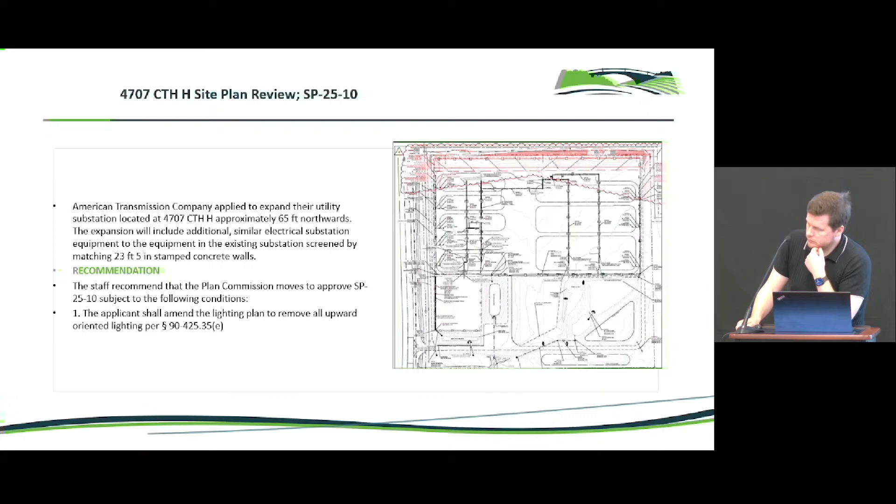Number 2, ordinance 02-2026, 3649 Lathrop Avenue zoning map amendment, ZMA 26-01. And it looks like that's gonna be Robin.

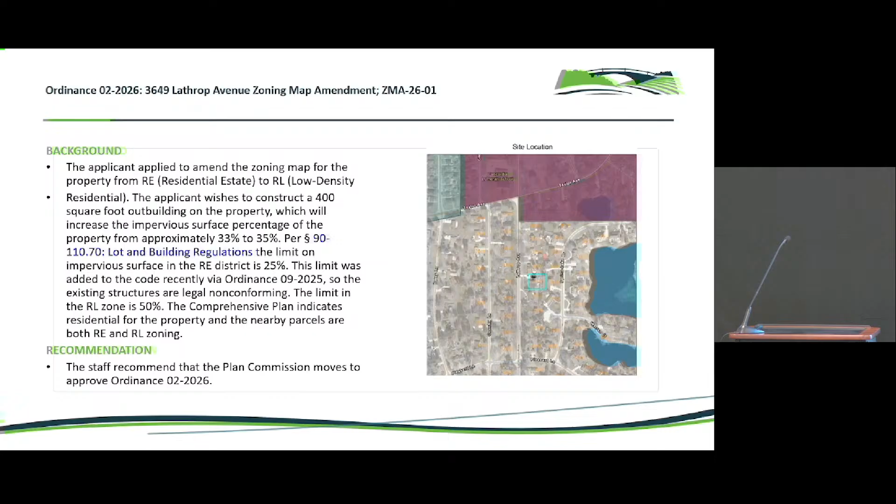Just a small aside on that last one. Some cell phone towers are disguised as trees, especially in California. They make them up to look like trees, probably because cell phone towers could be subject to the ordinance, but the utility companies are just like, shrug. The effectiveness of such disguises is left to the eye of the beholder, but it's something that I thought was neat.

Anyway, okay, so we're going on to ordinance 02-2026, 3649 Lathrop Avenue zoning map amendment. The applicant applied to amend the zoning map for the property from RE, residential estate lot, to RL, low density residential. The applicant wishes to construct a 400 square foot outbuilding on the property, which will increase the impervious surface percentage of the property from approximately 33% to 35%. Per the lot and building regulations, the limit on impervious surface in the RE district is 25%.

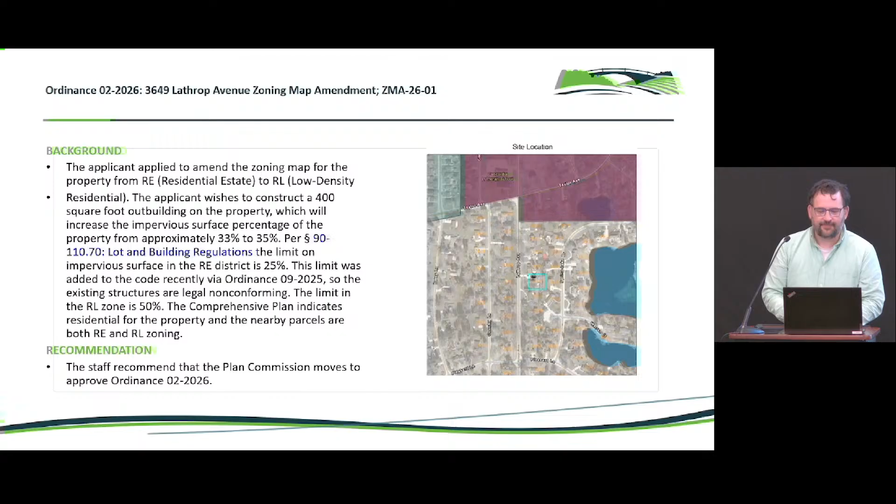However, this limit was added to the code recently via Ordinance 09-2025, so the existing structures and their impervious surface coverage are legal nonconforming. The limit in the RL zone is 50%. The comprehensive plan indicates the residential designation for the property and nearby parcels are both RE and RL interchangeably.

This is one of those parcels that is in an in-between area where it could conceivably be either of the zoning designations. In the 2020 zoning code, we usually picked one based on some factors. If it was a little bit larger, it got RE. If it was a little bit narrower, it got RL. All of the lots in the Spring Lake subdivision are RE, so sometimes adjacent lots also got that designation.

When the impervious surface change was implemented in summer 2025, staff felt the village would need to draft alternative compliance and flexibility components to prevent the need for variances or rezones over relatively minor code compliance circumstances. This application would be an example of where that would be needed. We didn't want to go out and do all of that until it was shown it would probably be needed.

Staff plans on bringing some suggested provisions to Plan Commission in the near future, with the goal of encouraging stormwater management best practices throughout the village. We're looking at different models, whether it goes under the stormwater fee umbrella, or uses some kind of bonus or credits for best practices. Other localities have that for rain barrels, rain gardens, and similar measures, as a thank you to people that lighten the load on our stormwater management system. So we want to build in flexibility, and reward folks who want a more pervious or stormwater friendly area.

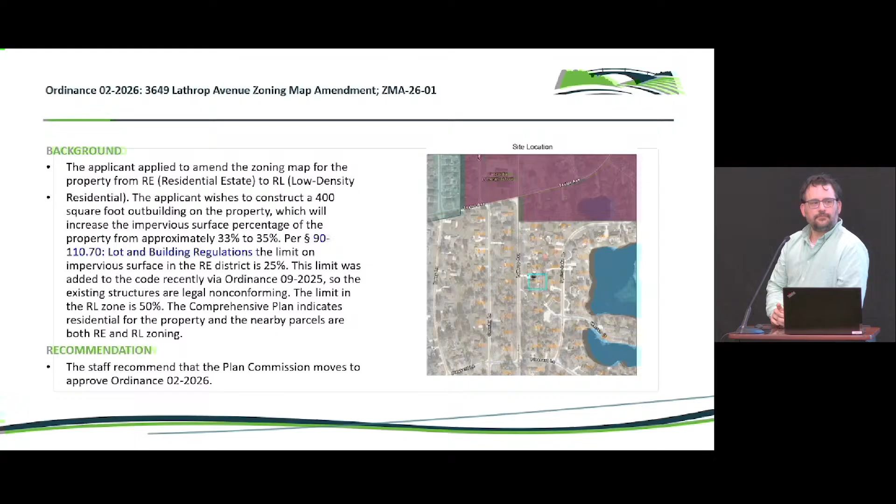They would still need the rezone though. The whole point is the impervious surface coverage, so. Okay. Mr. Chairman. Nancy, I guess, based on our code, first of all, were he not asking for putting up this extra building, which triggered the rezone based on the impervious surface?

Some of these lots that are kind of spot lots that the land use plan changes and the zoning code changes kind of left out there like this, they could come in by right, could they? Or I guess the question is, could they not come in to ask to be rezoned to a more proper zoning for their property without the impervious surface requirement? Yes, they could. So they could have asked us to rezone this to RL, because that's really what district this land sits in. So I don't have a problem with rezoning it to RL at all.

So that applies in the RE district, but not in the RL district. And those are that it can match, it should match the materials and colors of the main house, which has been kind of problematic to enforce because, depending on when the house was built and they're building the outbuilding, they may not match. We don't necessarily want to make everybody make their garages out of brick, so you have to accept stuff that looks like brick, which opens up some room for interpretation.

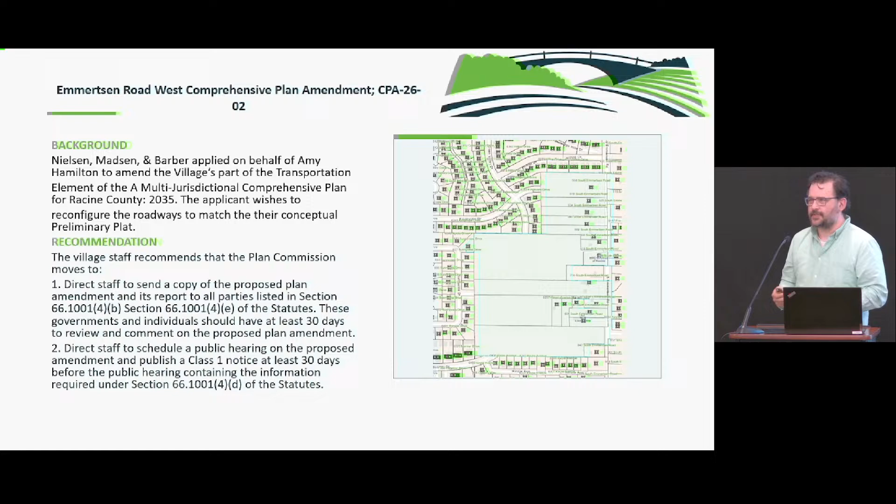The applicant wishes to do a subdivision on 12 acres of property, and in order to do that, they have to modify the current plan, which has 3 exits out onto Emmertsen Road: one that lines up with Kinsey, one along the site of Haven, and one a little further to the north. They aligned it as shown on the screen.

I will say that the proposed map as written is not feasible. It goes through some houses, some properties. It doesn't line up with what currently we would do no matter what. So there would need to be an amendment of this proposed road layout, no matter what.

You mean the current layout? The current proposed road layer is not possible. Okay, so it needs to be amended before anything can be done. So they're bringing an amendment and having it match what they're proposing.

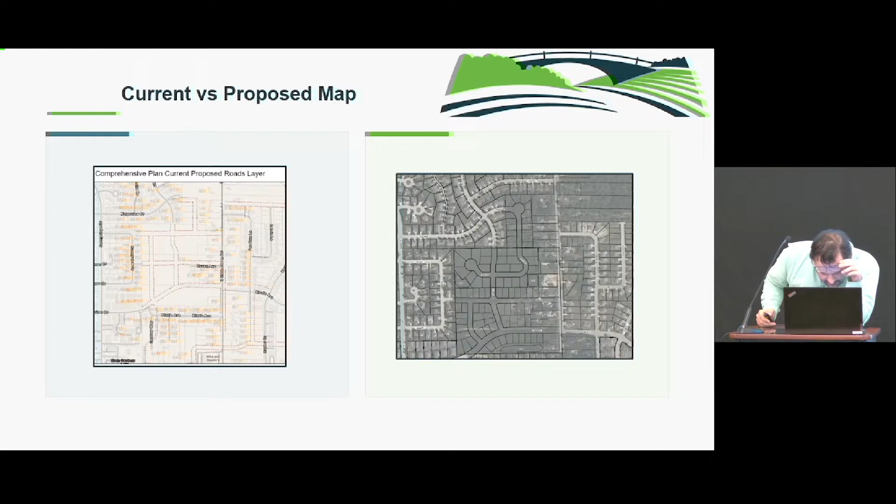You were talking about the proposed road that says public road, the northeast. Correct. So is a cul-de-sac there potentially? The connection is currently marked on there. So Green Valley is the only existing access that is currently built.

No, there's 2 stubs: Green Valley, and that is Explorer Drive off of Sunny Slope. Those connect into the neighborhood, but connecting out to Emmertsen would be only the Kinsey connection. Right, which is not the property under review by us.

Correct. But anytime that property's been considered for development, we've mentioned that that road should be extended no matter what anyway. So that's just putting all of that onus on that one property.

Well, I don't know that we can, in other words, this parcel stands alone. It currently has one access onto an existing road, which is Green Valley. That's the way I see this. Yes, this particular parcel, correct. And that's the one we're ruling on today.

We're ruling on the comp plan for the parcels, not the comp plan outside. On the comp plan, the roadway comp plan, right? Yeah, so that plat is not—not the use, but the roadway. Correct.

So by ruling on that, when we have a comp plan for roadway that says the parcel south of the one actually before us must be developed in a certain manner, in this case access to Kinsey as well as access to Emmertsen. Am I understanding that correctly, the parcel to the south?

Yes. So if that parcel came to us with some crazy different road layout but still made those connections, that's what's important, those external connections. They can do whatever they want inside, to a degree. It'll measure itself out. If it doesn't meet exact, we can nitpick it, but if it basically meets that and makes the connection viable, we can allow it.

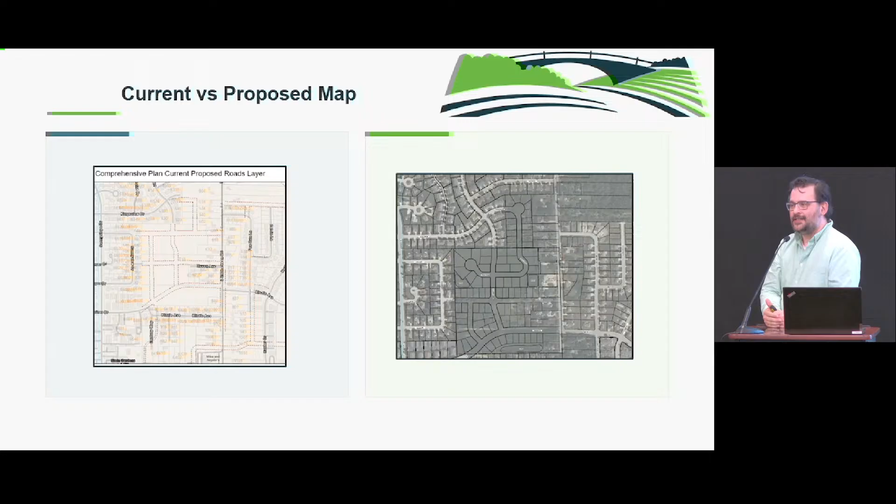But somehow we let them lose that. We gave away that. It wasn't really ever up to that kind of decision. It was always ticky-tacky, and that was a very narrow one anyway. It would have been like threading a needle through a keyhole or something less, but it could have worked. It could have been possible.

I mean, I like the way the neighborhood shapes up. There's some long roads on it, and we're not gonna get all the external accesses right away for this particular site, but I like the way the road plan lays out, and I think you've done a very good job of using the accesses and spaces that are there to allow access.

It can sound like I'm being negative on it, I'm not. Yeah, you are sounding totally negative. We are fine with this connection, we just want to put a big flag and say, hey, remember that we're making this decision and we need to stick to it in the future.

Okay, so we're simply doing the comprehensive plan amendment, and then we will see the plat later on in its various phases, zoning and platting and so forth, as long as we amend the plan, right? Correct.

All right, I'm still a bit confused, but nonetheless. The fact is that we're looking at an overall plan, but then there's the last one you gave us, off of Green Valley Road, there's like a 20... That's just a concept exhibit, Joe, they haven't submitted anything formally. Okay, that's why I'm a little confused, why that's in the packet even, because we're really not considering that, right?

Yeah, that's just what spurred this application, they want to develop that north property. And we said you have to amend the comp plan because there's all these road connections you're not following, since it's no longer accessible off Emmertsen Road there. So that's just there for context, but you're not deciding anything on the actual subdivision plat. Really, all you're doing today is voting to forward this to a public hearing.

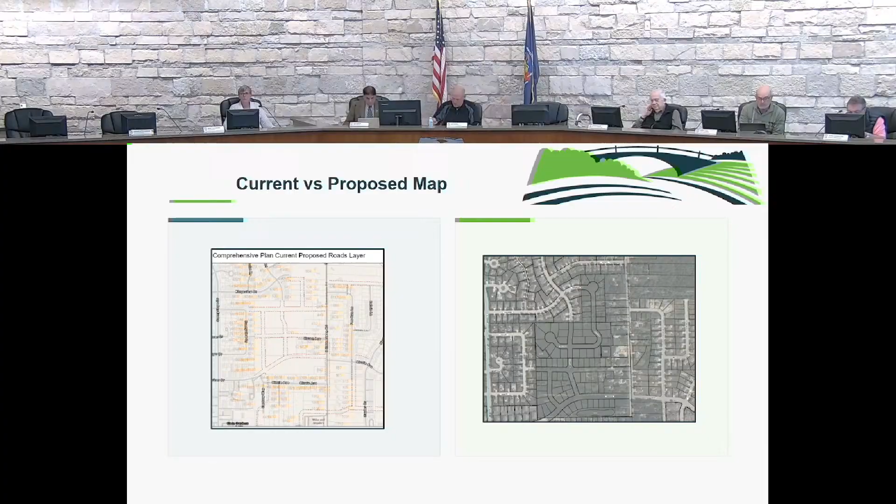Okay, number 4, 10460 Washington Avenue Site Plan Review, SP 26-02. And it's Sam.

Mr. Chair, Keller Inc. applied on behalf of Urban Trends Salon Spa, whose name is transitioning to Beauty and Soul Salon and Wellness, to construct a 5,172 square foot new building at 10460 Washington Avenue. The proposed site plan includes a building, trash enclosure, and related parking lot. The application meets the elements identified within the multi-jurisdictional comp plan, the park and open space plan, and the Village of Mount Pleasant master bicycle plan.

The application does not include a land division. The property is zoned C2. The C2 district permits commercial service uses as of right. The application does not meet the following zoning requirements, which I'll get into in a sec, for our recommendations for approval. The application does meet the following key strategies and outcomes as balanced growth and development within the village. Our recommendation is that staff recommends the Plan Commission move to approve the application subject to 4 conditions.

The first is updating the landscape and screening plan to include 1 canopy tree per every 4 parking spaces per the ordinance. No portion of a parking lot can be more than 150 feet from an interior or perimeter canopy tree. Second, the applicant shall update the landscape and screening plan to denote the ground cover for the non-developed areas of the property, and we recommend they use native prairie seed mix for as much of the non-developed area as possible, which is the pre-settlement landscaping pattern for the area of the village.

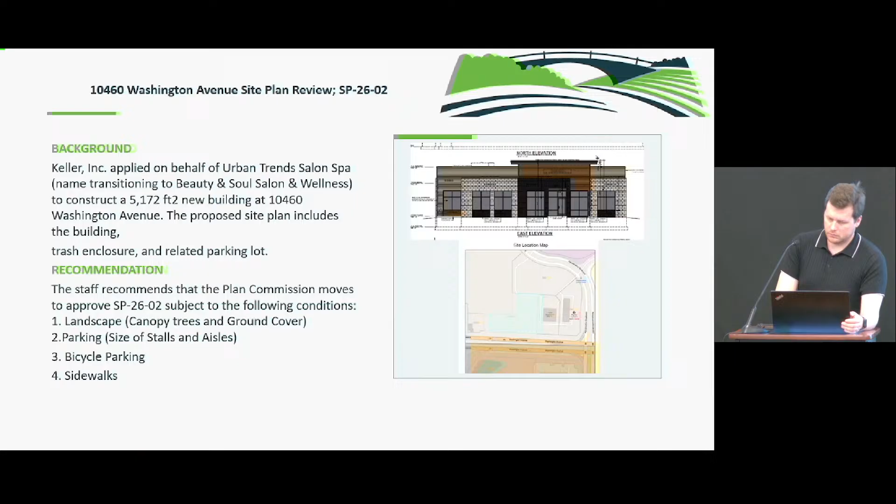State Trunk Highway 195, access restriction modification. Mr. Chair, Attorney Nick here in the audience from DeMark, Kolbe & Brodek requested on behalf of the Draeger-Langendorf Funeral Home to approve a modification to a village-mandated access restriction on what is now State Trunk Highway 195. The request is to remove the restriction for the existing driveway location while keeping the remaining restriction in place for the rest of the frontage. Approving this resolution would permit the attorney to file an affidavit of correction at the Register of Deeds on behalf of the property owner. They want to clean up their title for estate planning purposes in the long run.

The request complies with the transportation element of the comp plan, both the land division and zoning ordinance, and our strategic plan. We recommend that you move to approve it.

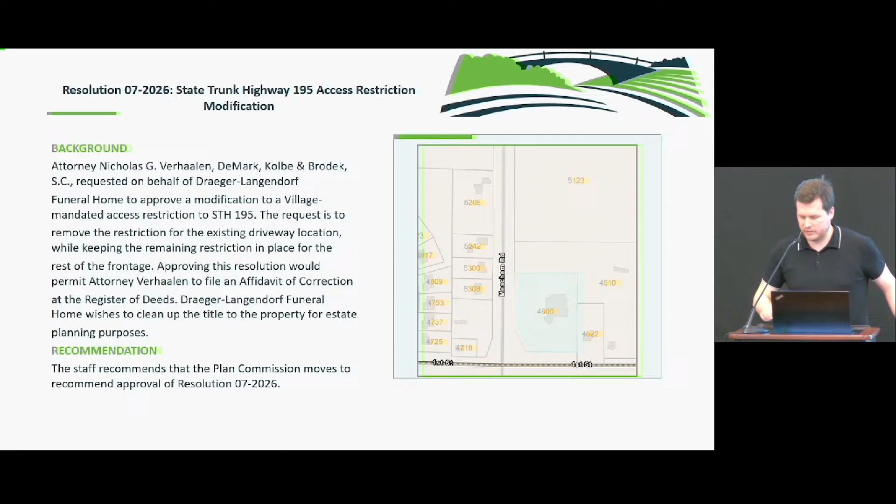This is a pretty interesting one that's taken a lot of staff time, insofar as it's a local restriction that Mount Pleasant placed on it back when we were maybe a town, at the time it was a county trunk highway. So it's weird that we would restrict anything on a county highway to begin with. Since then, the county and the state have traded, done a little horse trading, so this is now a state trunk highway. We went to the DOT and asked them to remove the restriction, and what they told us is this is actually a locally administered restriction, so we all have to remove it, even though it's not a Mount Pleasant road.

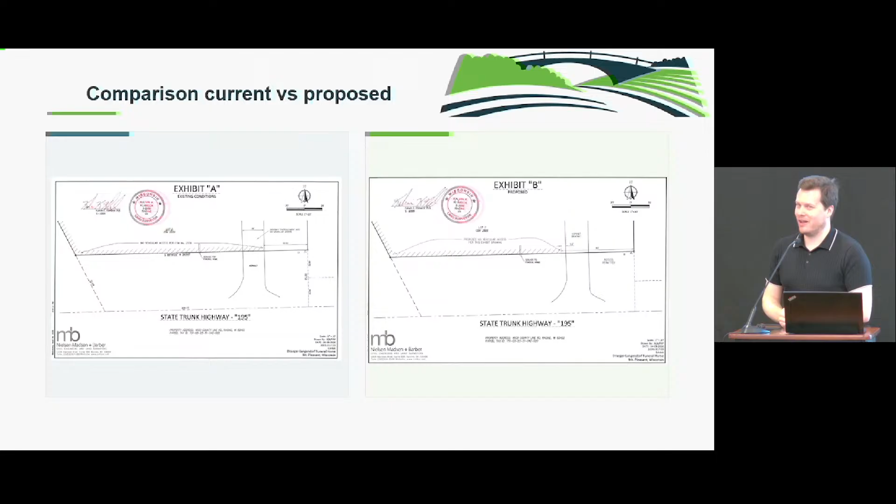So this is where we've gotten to. They just want to... I hope they don't come around. Nick, make sure you get that in writing from them. Yeah, we have the email in writing from DOT, and both Nick and I are on that email chain.

Probably Frank's fault. It probably was, because we were semi-opposed to this rezoning at the county level back in the day, and I think the restriction was kind of a quid pro quo to let us say, yeah, we'll go ahead.

So the problem is the existing driveway is in a place where the restriction is. Just to clean up title, we're saying the driveway width is outside of that restriction, but the rest of the frontage, you can't drop another driveway right on the intersection. So we're just trying to have it match what exists there today, essentially. One of those weird ones that we run across every now and then.

Robin did a bunch of back-end research. We've been going back and forth between the landowner, the funeral home staff, and us. So this is where we've gotten. This would be on the village board agenda in two weeks for approval, likely on the consent agenda, just to get this property title cleaned up, if you all are good with it.

Although the restriction has been there, people have gone through that. Right? Oh yeah, the driveway's been there since they built the building. It's just some lines on a map that I think the title company caught, correct? I'm guessing the title company caught it. So none of us were any the wiser until this happened.

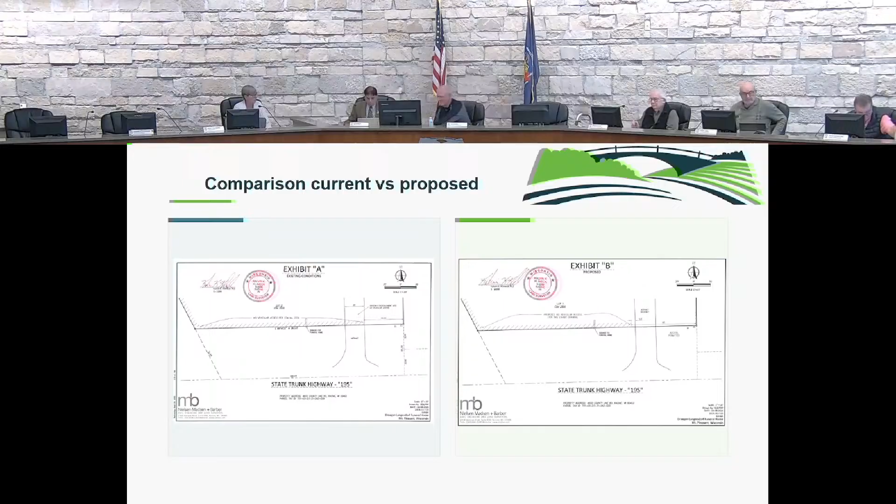Staff reports. Do we have anything? Just a quick announcement that I am going on paternity leave starting next Monday until after the 4th of July. So if the commissioners have any questions, direct them to Robin or Deputy Administrator Patrick.

You'll get an out-of-office email for the time being. I'll see you in a couple months. Congratulations, so how long is the paternity leave? 2 months, 3 months? 2.5 months. Well, when we were having kids, I had to work every day. I want to be a staff member and have another baby so I can get 2.5 months off, which neither one are going to happen. So congratulations, Sam, very good.

That's a great opportunity to spend time at home with your little one.